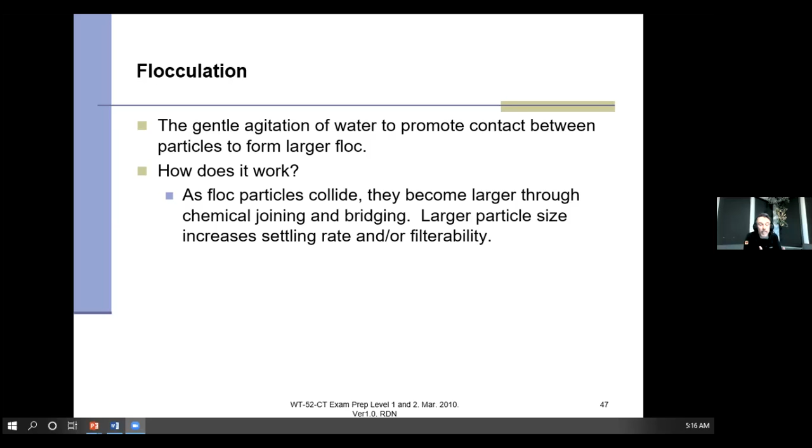And we created these flocks through the coagulation process. So now what we're going to do is take these flocks and mix them very slowly. What we're trying to do is promote contact between all the particles in the water, because we want to make these things bigger, much bigger, like the snowflake looking flock that you saw in the little video there - that's flocculation. Let's let these things work for us, because the more they get bigger, the easier it is to get rid of them, and that's what we want to do.

Let's get these things out of there. As flocks collide, they become larger, right? And again, remember, these things are full, they're sticky, number one. Number two, they have charges, some negative, some positive, and they're going to stick together. The better we make these things stick together, the more they're going to be able to get out of solution, which is perfect.

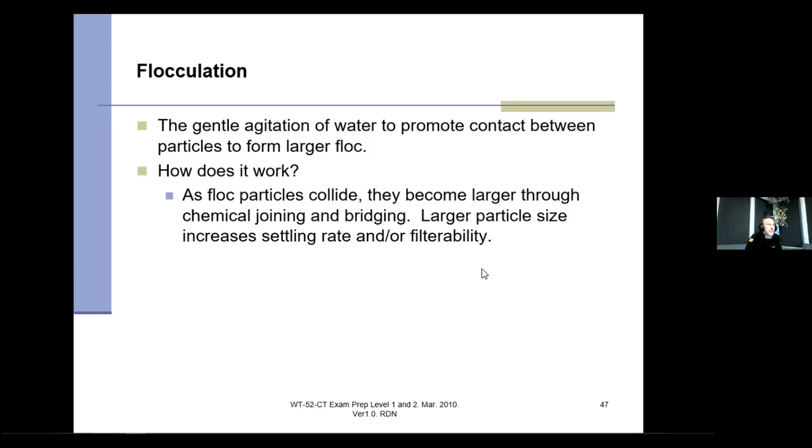Flocculation follows the coagulation process, and is basically a period of mixing. Here's the thing though - we don't want to mix them too fast, because if we create these snowballs and these flocks, and if we mix them too fast, poof, they blow apart again, and then you're no further ahead. So it's very, very important to keep the mixing at a very slow and easy rate, or else they're going to break all these things up again, and then you're in trouble. So always, you want the water moving, but not moving fast like you did in the rapid mix.

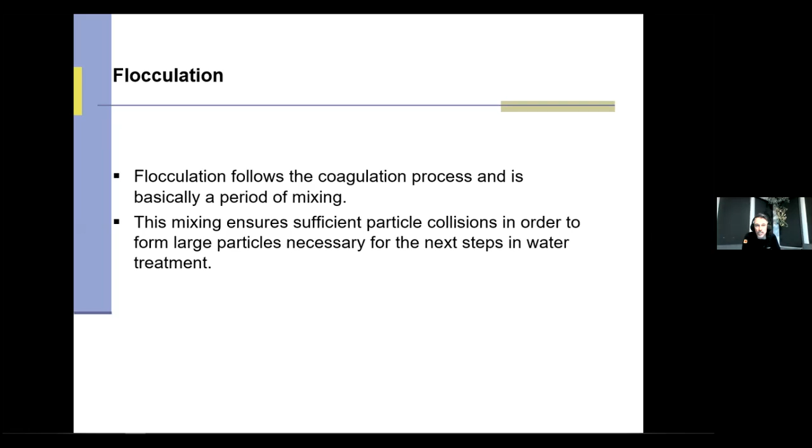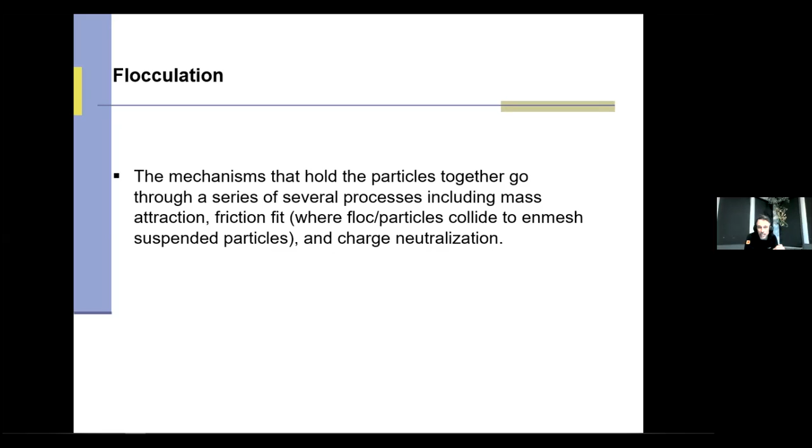By definition, the mixing ensures sufficient particle collisions, and that's super important. It goes through a bunch of processes, right? From a chemistry standpoint it goes through mass attraction, friction - a fancy way of saying all these particles are going to collide. The magnet part, or the charge part, will allow them to stick together. Charge neutralization as well, so we just kind of keep everything all together.

In the flocculation process, it's essential that the flocculation agent be added slowly. Some plants will add a flocculation agent, and we'll talk a little bit about that. The words flocculation agent and polymer, or polymer aid, are all very interchangeable, and they have a certain reason why we do it, but we'll talk about that in a bit.

All we want to do is basically - coagulation is destabilizing those charges. Flocculation is now allowing contact between all these tiny flocks to make them bigger. That's really all we're doing.

We're going to have to, sometimes, there's stuff that happens. So think about if there's not enough weight, right? We've got all these fluffy flocks and they're not settling very well. We're going to add extra things in there to make them sink, or add liquid weight or liquid strength. And those are what we're going to be calling polymer, and we'll talk about that a little later in the lecture here.

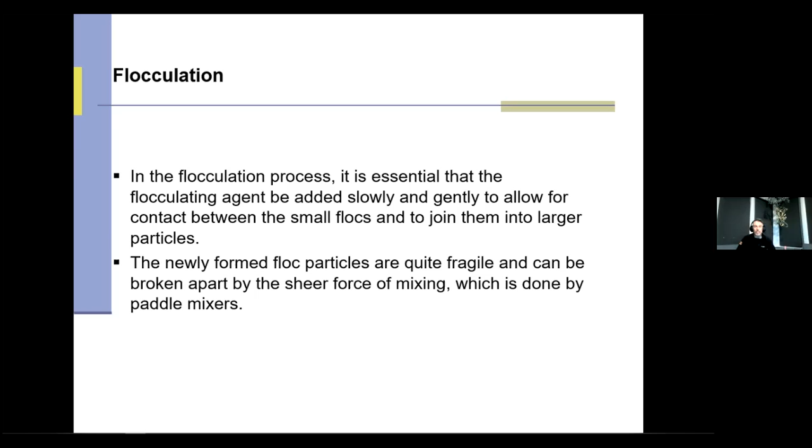These newly formed flock particles are fragile, right? They can be broken apart by mixing too fast, or currents or something like that. So we've got to be really careful that we don't break them.

There's a bunch of different types - again, inline mechanical mixer, vertical flocculators, hydraulic which is just using water. Some places use a different route that the water goes through that it'll mix as it's going. Turbines - these are all different ways, as long as you're keeping the water moving. Because two things: you don't want the water to stop, and you don't want it to mix too fast. So it's really important to keep the water moving somehow.

Typical is the way you saw in the video of my plant, where you have those really large mixers. They're moving very slow, just enough to keep everything in suspension or moving around so they collide with each other. So that's super important.

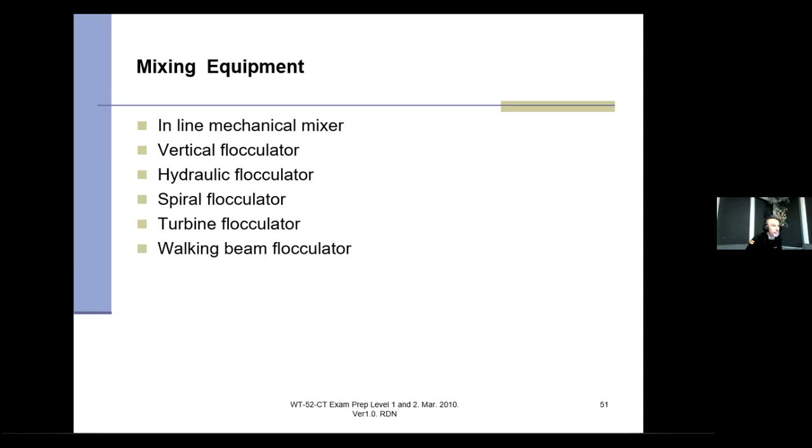We'll talk about coagulant aid, and basically they are a bigger flock agent, and it could be negative and positive. Think of it like liquid weight or liquid strength. A lot of the time they're chains, heavy chains with a bunch of bonding sites on there. And all those flocks, those balls of flock, can actually attach. They can come as positive, negative, or a little bit of both.

And if I'm having problems settling my flock, if that's the process I'm using, this will help it, give it some weight or give it some strength.

So for my plant, as you saw there, when those flocks left the flocculation where you saw that light, I put it to a dissolved air flotation. And a dissolved air flotation has air that's pushing these flocks to the top, and you saw that in that brown goopy mess. Now, if those weren't very strong, the air could actually damage the flock.

So I'm going to add a little bit of a coagulant aid to make my flock strong so that the air doesn't break it apart. So I actually use a coagulant aid or a flocculation agent, and that's what they're called. It will keep things strong or keep things heavier if I need it.

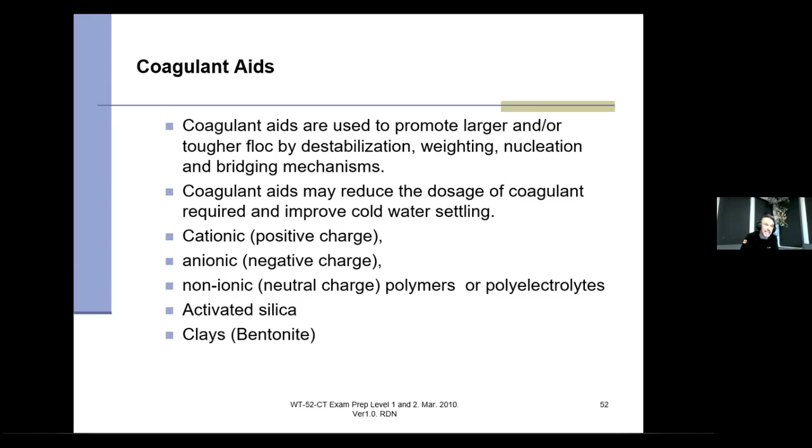For me, I don't want weight at my plant because I'm floating stuff, right? But I want strength. Some plants, though, they need to have weight. So those are the things you have to look at depending on your process.

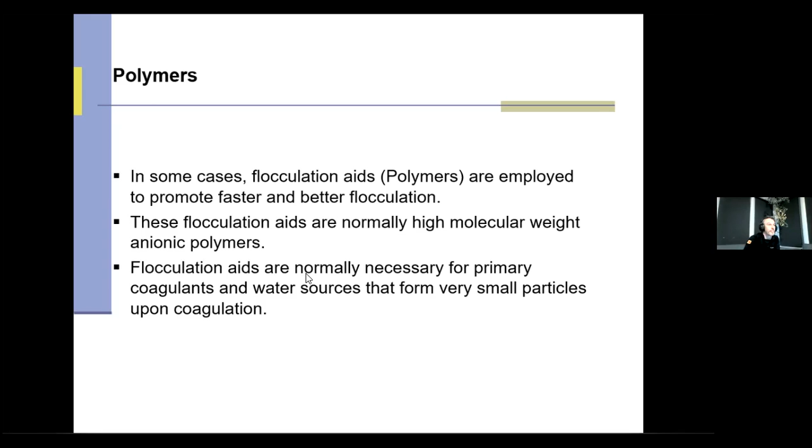Under the microscope, this is what it looks like. And you can see here, my drawing, this is a typical polymer. It could be long or it could be short. It could have lots of weight built in, or it might not. But each of these sites here can take on a floc. So you can see the flocs are made up of positive and negative and all these little particles that were floating around. So that is the coagulant and the colloids mixed together.

Think of this as a bus. All the people get on, the bus gets heavier, it will sink. Or this is big enough so that the air can float it to the top. It all depends on your process.

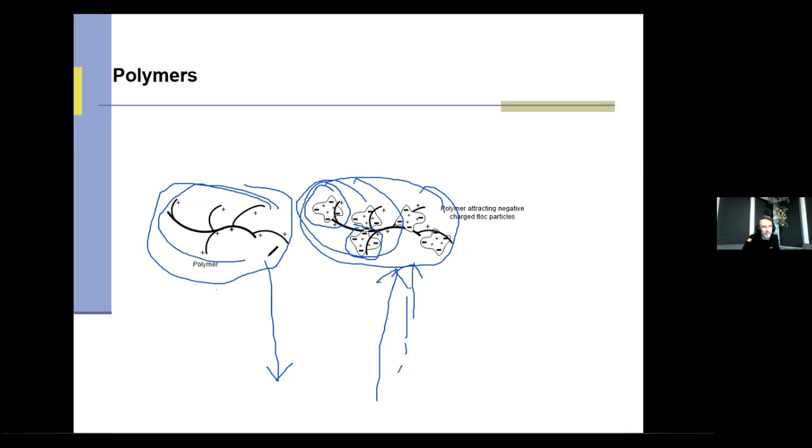For me, I don't want heavy floc. I want something lighter and fluffier, so I would have a smaller one. I would only have maybe these, and so that when the air bubbles come up, they're pushing that to the top, and you saw that in that video I showed you. Some places they want to sink them, so they'll have a heavy polymer to sink these things out.

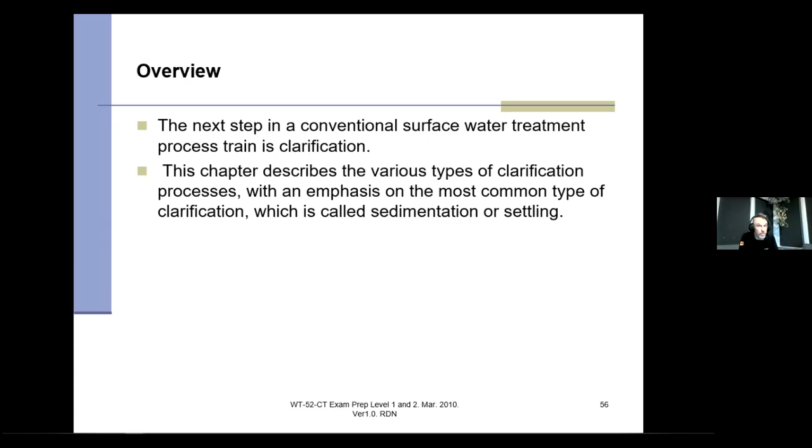It used to always be called sedimentation, and that's no longer used anymore because there's other processes, such as what you saw at my plant, dissolved air flotation, where we're actually floating that sludge, that product, to the top. So I like to use clarification, which makes a little bit more sense because we're not always settling things out.

Why are we doing this? We're removing those suspended solids, removing those floc particles. We want to do that to reduce the load on our filters, because if we sent all that stuff to a filter, it would plug that filter very quickly. So we don't want that.

Clarification, again, includes the solid contact clarifiers, sand ballasted flocculation, which is quite widely used now, and square or round sedimentation basins, we'll look at those. But the big thing is, let's get this stuff out of there. And that is the number one thing.

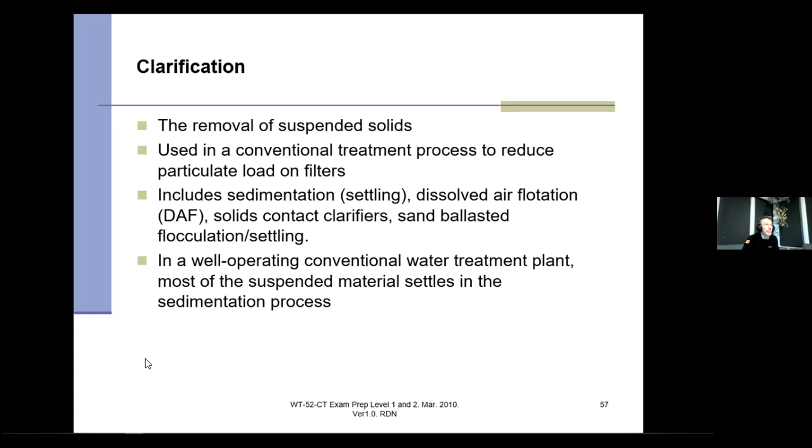Suspended solids, and it could be anything, turbidity, or these flocs that we created, are denser than water, and we're going to try to remove these by gravity. That's the easiest way to do this. When we stop the flow or slow down the flow, things will fall out of solution. That's really what we're doing here. We're allowing it to settle, or stop moving long enough for it to fall down and collect at the bottom of these tanks.

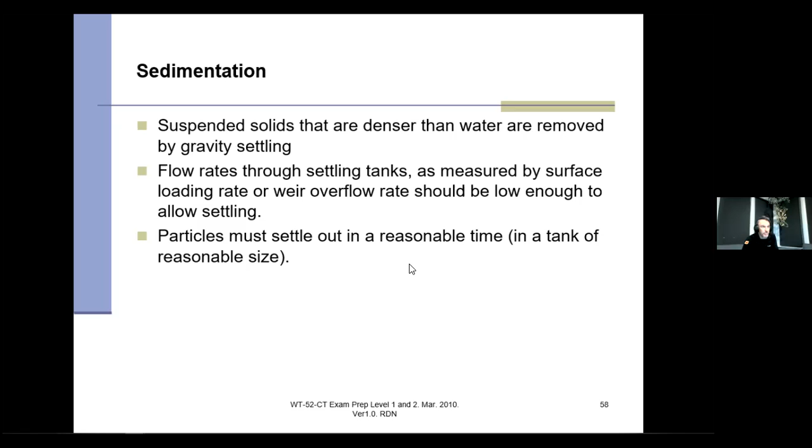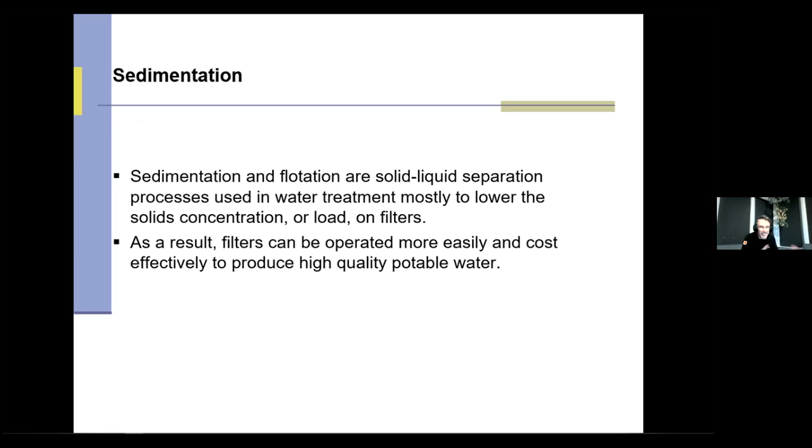Again, our whole thing is to lower the solids concentration. And if I do that, my filters will run a long time. I'll get a long filter run. We'll talk about filters probably next week.

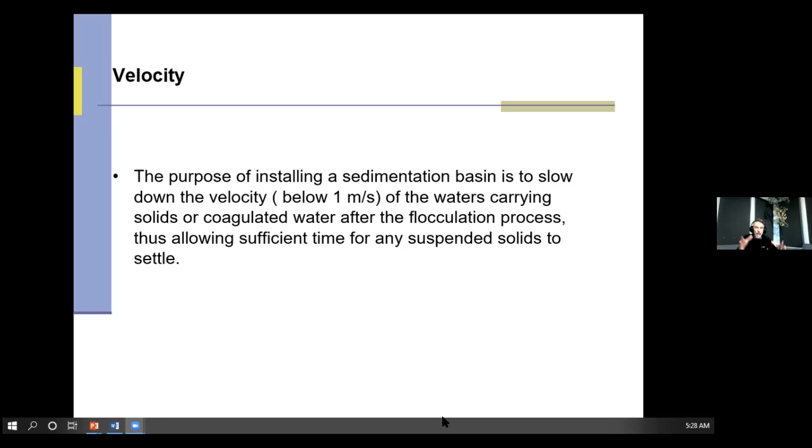Velocity is a pretty important concept, and it's the speed of the water. That comes up in a test a number of times. Speed is super important here because if it's too fast, these things aren't going to settle. We need to have it below 1 meter per second. If it's above 1 meter per second, it will stay in suspension. So you have to slow everything down below 1 meter per second, and that now allows time for this stuff to settle to the bottom.

The type of particles you have sure makes a difference too, and of course denser particles will settle out first. So if you have a lot of sand or silt in your system, that sand's heavy, right? And so that's going to settle out very quickly. If you put something that's light and fluffy, it takes a long time to get to the bottom of your tank. You put a couple of grains of sand in there, it's going to fall very, very quickly.

So you have to design these basins, whether they're square or round, long enough to allow what you have to settle out. And sometimes some places put sand in there. They'll inject sand, coagulant coated sand, because it will attach the particles and drop it very quickly.

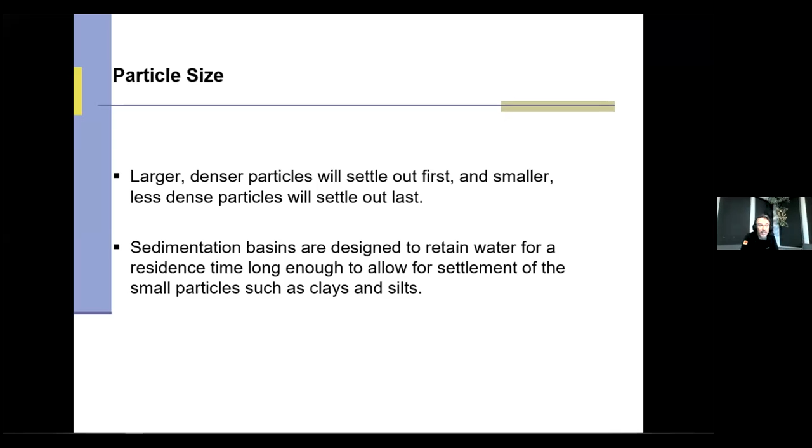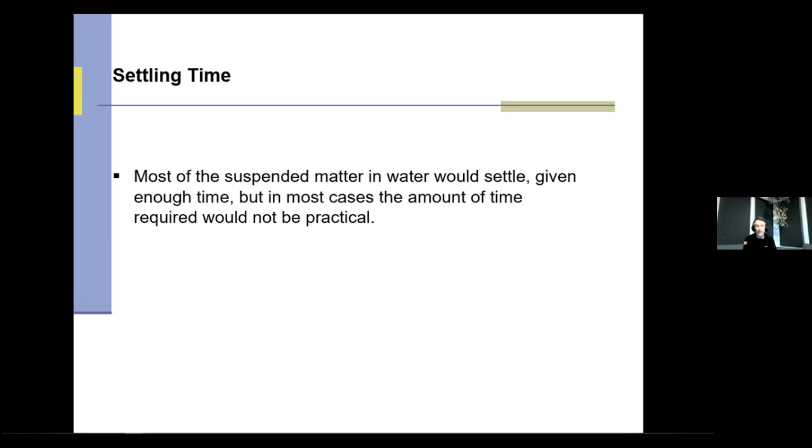In time, most of the suspended matter would settle. We know that, but we don't have much time. We don't have hours and hours and hours to wait for our particles to fall out of the water. So we have to try to speed things along, and that's why we do this. Polymers are our friend when it comes to this because we want these things to settle quicker.

Let's talk about the typical rectangular basin first. So basically your water's going to come in, it's going to be moving pretty fast, and all of a sudden it's going to be in this big open tank, and it's going to settle. It hits this big tank and everything's going to settle.

So there should always be something at the bottom of these tanks to remove this sludge and get it out of there. Proper maintenance is also very important to make sure anything collected at the bottom is removed. You saw in that video I showed you where you saw my empty mixing tanks. I do that because I have to clean those out once in a while to make sure that everything is clean. It's just part of regular maintenance.

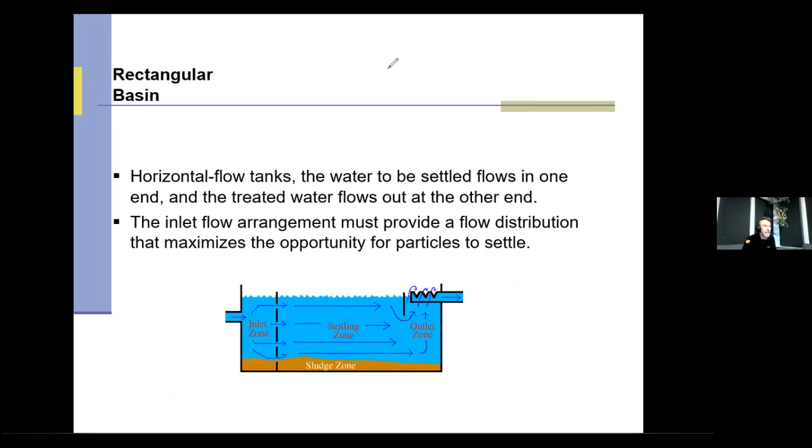And that's the rectangular basin. They use a thing called plug flow, and all the liquid advances together, right? That flow is moving as a unit all the way through that basin.

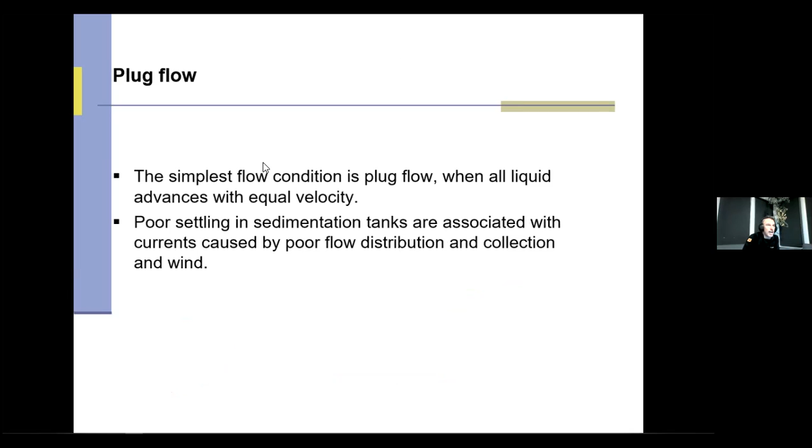The inlet zone, we saw that there. It's basically a smooth transition from the floc basin. It slows that flow right down and distributes that water evenly across the whole basin. It should reduce short circuiting. It slows that velocity down, and the big stuff starts to fall out in this inlet.

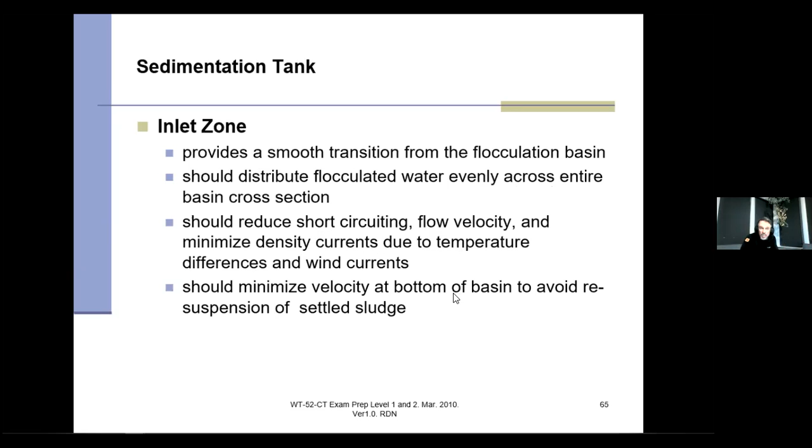The settling zone, again, that's usually the largest portion, and that's where most of that settling happens. Typical detention time should be about 3 hours. It takes a long time to get through there.

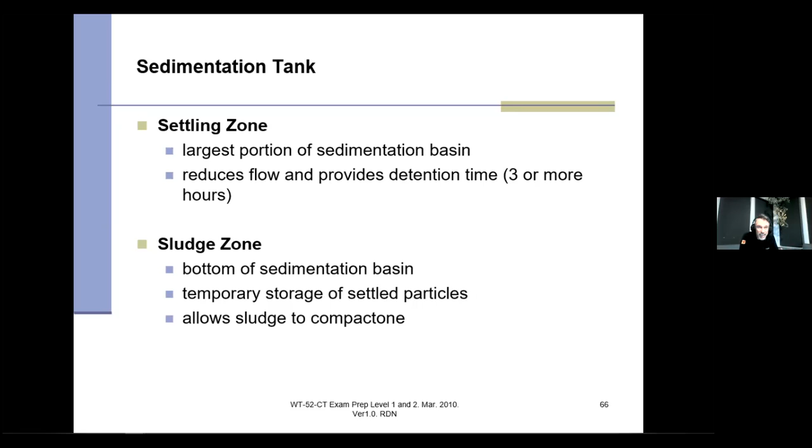At the sludge zone, we have to do something there - temporary storage, of course, but we got to get those out. They can't stay there. Then the outlet zone, and that's the transition from the sedimentation process, or the clarification process, onto the next process, which is going to be filtration.

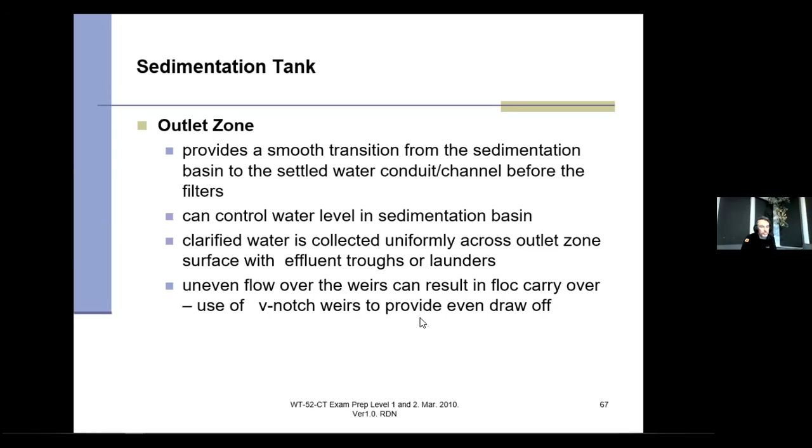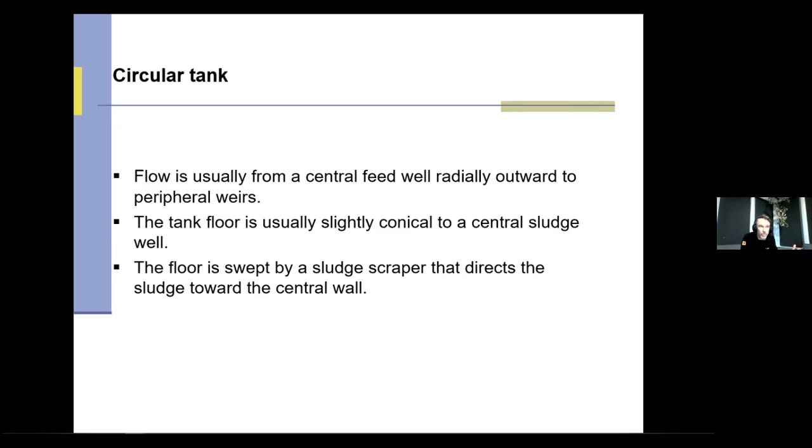Let's talk now about the circular tanks. Circular tanks are pretty popular. Flow comes in through the center of that circle, and it works outwards. So it has to flow basically in a circle and come out through the top. It's like a cone at the bottom, and then there's a scraper. I've got a good picture here of this.

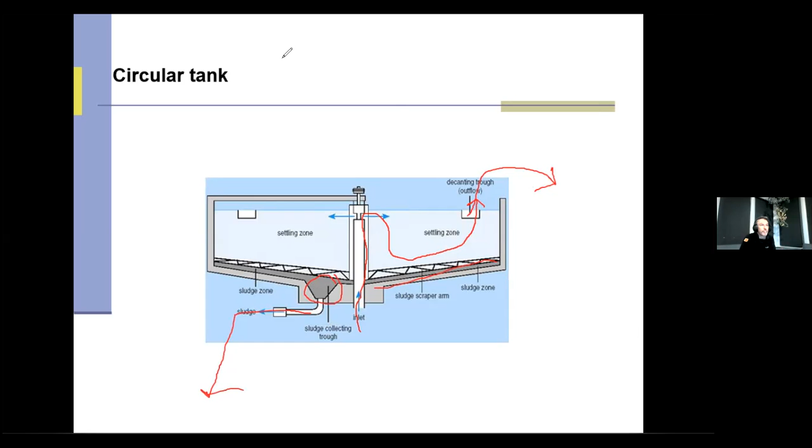The older stuff is really square basin, but it works well. But you'll see a lot more of this circular tank.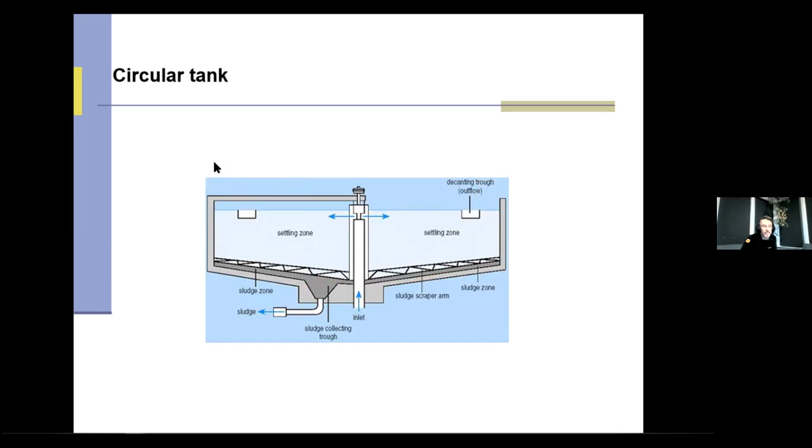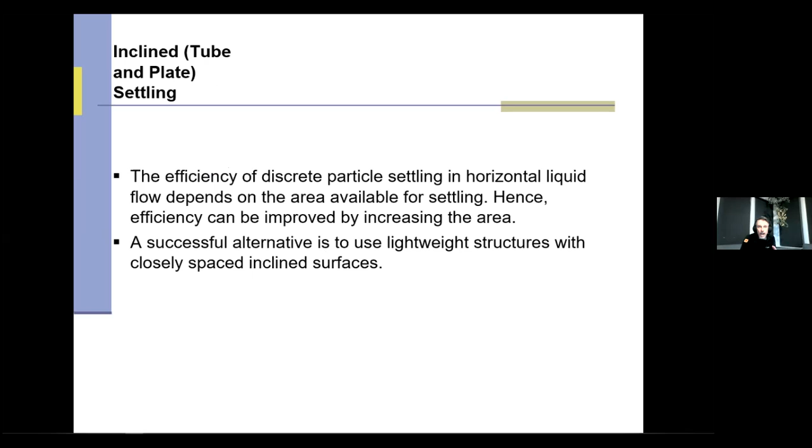Another thing you'll see too, and my plant used to have this particular unit, was something called an incline plate settler, also called a lamella clarifier. Basically what we do here is move water up a 60 degree incline plate.

So it acts as a little bit of a filter, and it works really well. This is called a tube settler or a lamella clarifier. It's important that this is going to be at 60 degrees or better - that's the angle it has to be in order to work. If it's any less than that, things don't work as well. So you always have to make sure of that.

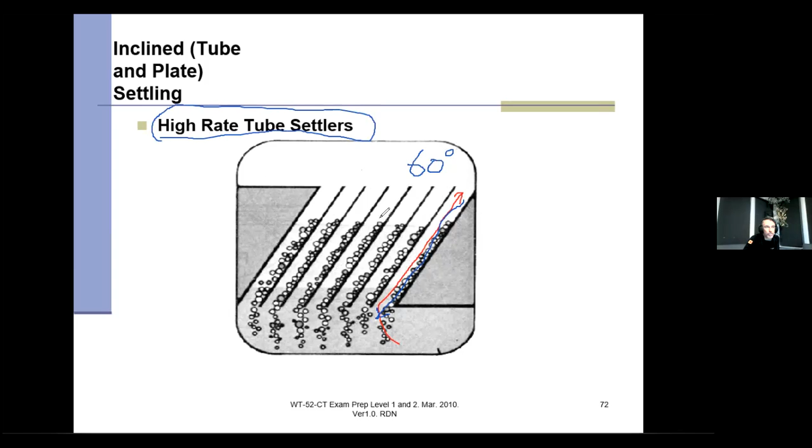You can see a typical unit here, and I actually have one of these units at my plant for my backwash waste - we'll talk a little bit about that when we get to that chapter. Water's going to come in through here, and it has to travel up that 60 degree angle out to the end, and the sludge is going to move down and fall into this hopper at the bottom. That's really what it is.

It works fantastically. Again, I like to say the 60 degrees is the target. It works well, and there's no moving parts inside there - the water's doing all the job, and that's exactly what you want. There's no big mixers or anything crazy in there. It works fantastically, so I'm always pretty happy about that.

And those are called incline tube settlers, lamella clarifiers. Sometimes I'll add a little bit of polymer just before I add it to here, and that allows me to make sure that it's heavy enough that it's going to slide down that particular plate.

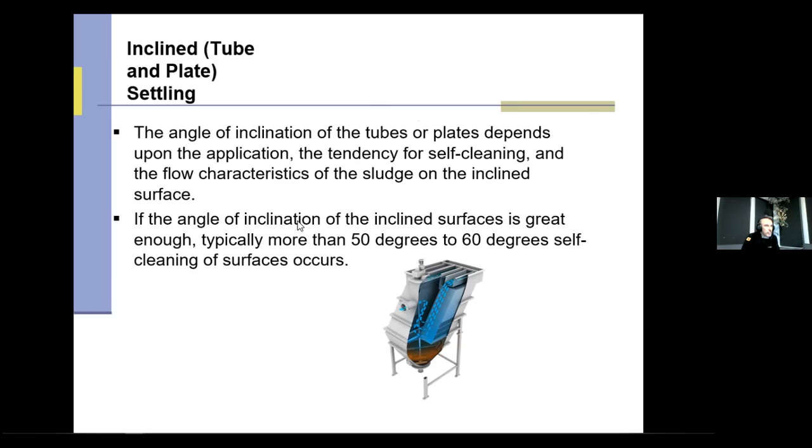We'll talk about the solids contact unit. A solids contact unit clarifier is a pretty hard clarifier to use. It basically takes everything we just talked about today - coagulation, flocculation, and sedimentation - and does it all in one step, all in one tank. It's a lot more difficult to control because there are three processes happening inside here, and it's always really, really tough.

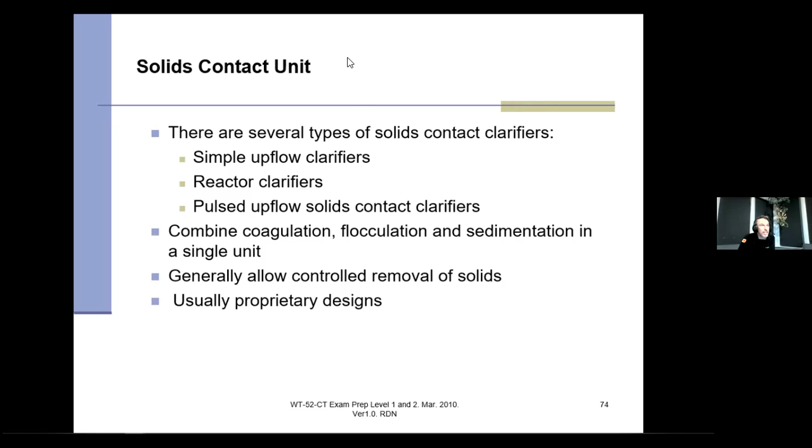Also in here is bacteria, coagulant, flocculant - all the stuff is sitting in there. I'll answer that question in a second about adding more coagulant, but hang tight with that one.

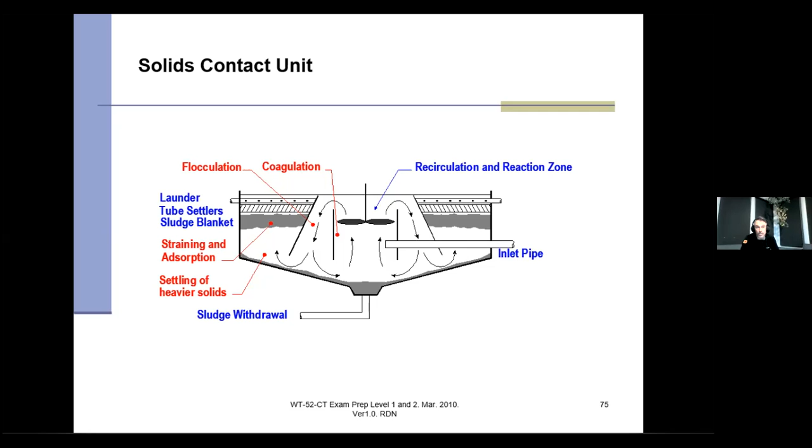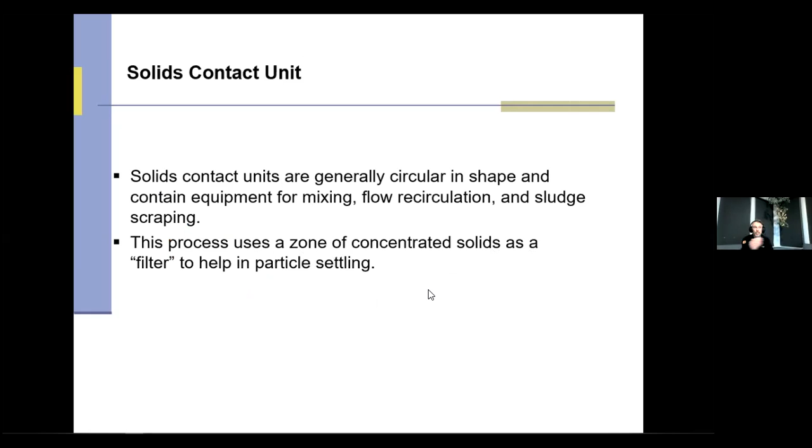So that's a solids contact unit that we just talked about. By definition, it uses a zone of concentrated solids - that jelly layer - as a filter to help in particle settling. It's your job as an operator to make sure this zone of concentrated solids is good.

Dissolved air flotation. What I'll do is show you the rest of that video from my plant of my dissolved air flotation, which is what you saw earlier.

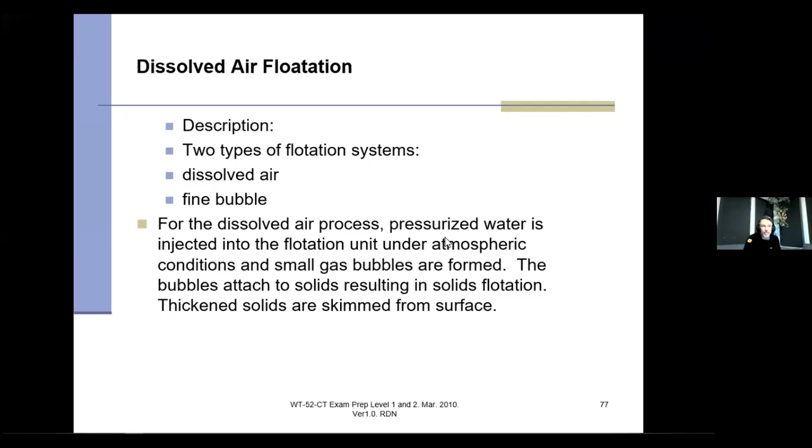It basically works like this: pressurized water is injected into the flotation unit under atmospheric conditions. It forms gas bubbles, and you can see in this picture here with my pen. I take some water, mix it with air, and think about a soda pop. Imagine I shook that thing up and opened it — it fizzes up. There's a lot of energy there.

That's exactly what I'm doing here. I'm pumping air into a saturator and making it super saturated with air. Then when that air enters this tank, there's a lot of energy, and that air bubbles will push your floc, all that stuff, to the top right here. You saw that in my video.

All that stuff at the top, that's all the floc that I created. Over time, I'm going to take a rake and push that stuff out of there and get it out of the solution. The good water is going to leave at the bottom through those white pipes you saw, and the stuff at the top is going to go on to another process or get dewatered.

This is a very effective process, especially if you get the bubbles right. Again, if your flocs are too big, it won't work. We don't want this stuff to ever settle — we want it to float. So it's really important to keep that floating.

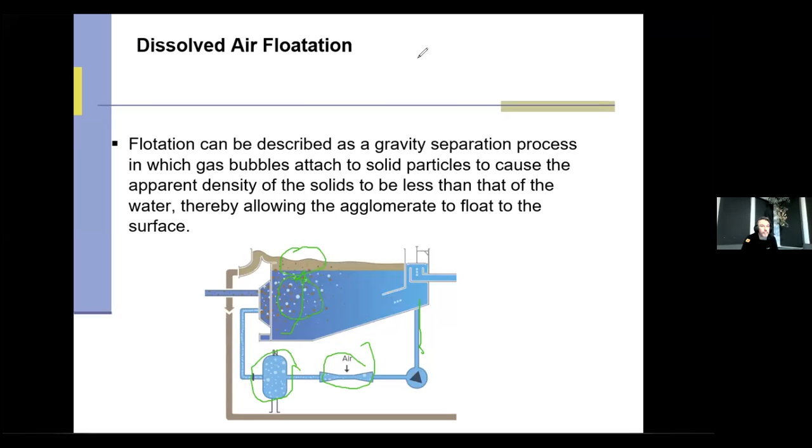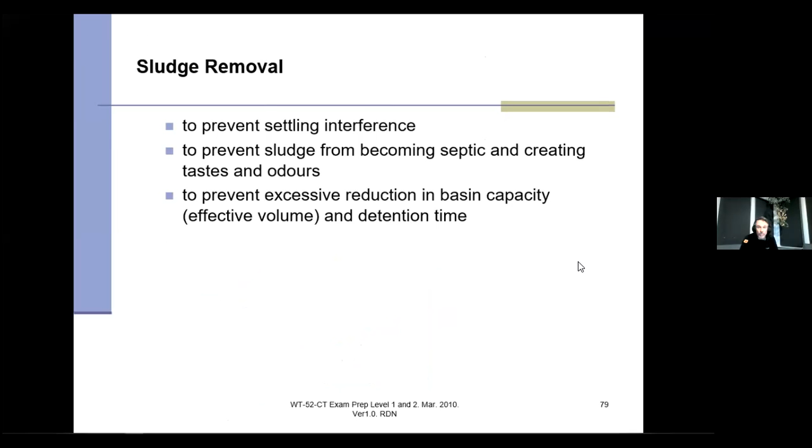Okay. Sludge removal — we're going to talk a little bit more about sludge removal in a couple of chapters from now. Again, we don't want sludge to stay in there, because what it does is become septic and creates more taste and odors, and that is not what you want. It also takes the basin capacity away — the less capacity we have, the worse it is.

All right, that's our last slide for today. I'm going to throw a couple more videos on — I'm going to show you two more things before we go today. First, let's take a look at the DAF again — you saw the first part of it, so I'm going to show you the second part where I'm actually scraping the floc away after it's been treated. It's pretty gross. The second one is I'm going to show you how I add coagulant and polymer to my flocculation and coagulation process. Give me a second, I'm going to flip over to a video here.

Okay, you should be able to see my video here. You should see some rainbow-looking pipes — if you can see that, give me a thumbs up. Awesome. So what you're going to see here is the DAF unit, and I'm hoping this is the right video — I have two of them here, so if not, I'll throw the other one on. But you're going to see the product coming off the DAF, or the DAF itself.

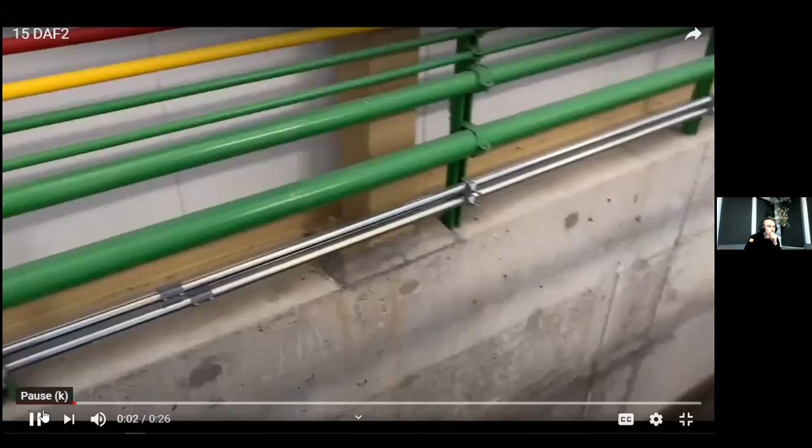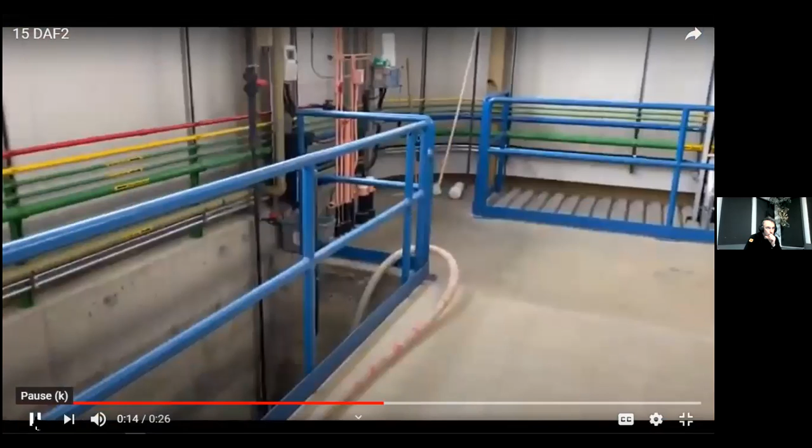Now, water leaving the DAF — it looks pretty clear. You can see it here, and that water is coming from those white pipes at the bottom of the DAF that we saw earlier. Let's take a look at the turbidity coming off of that today — there it is right here: 0.25 turbidity leaving the DAF. That's pretty good, okay, so that's a good one.

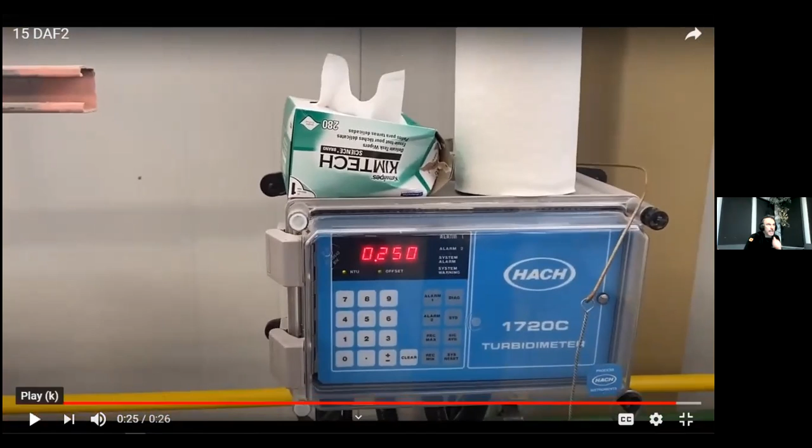Let me just put another video on here. I took those with my cell phone, so I apologize for the quality of them, but they do the job pretty good. Okay, let's get this one going here.

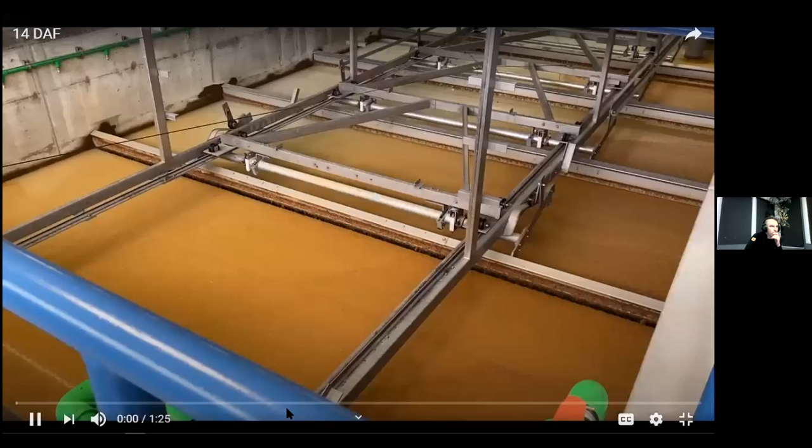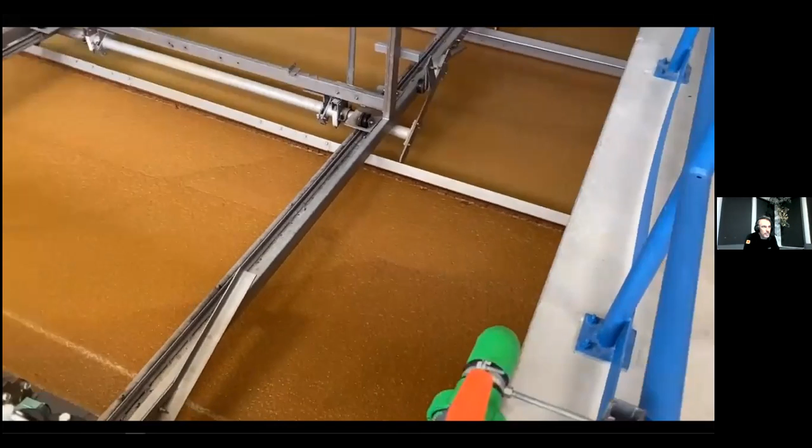Okay, so our skimmers are running — you can see how they're moving here. They're going to be moving that product over this way. The whole idea is to get rid of that stuff. The water underneath should be really clear, and you can see this going right now. Let's see if I can get a closer look down in here.

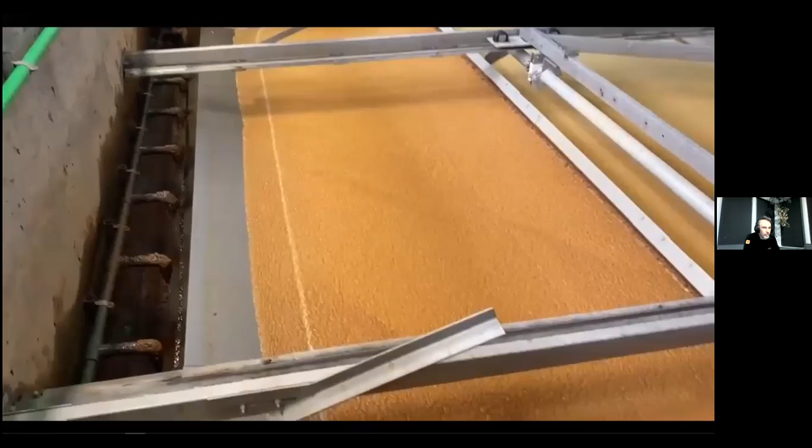Now those brushes are pushing that product towards what they call the beach, and the beach is that silver part that you see right here. It's going to push all that sludge and stuff up the beach and into that trough to the left here.

Here we go. Imagine all that was in our drinking water before.

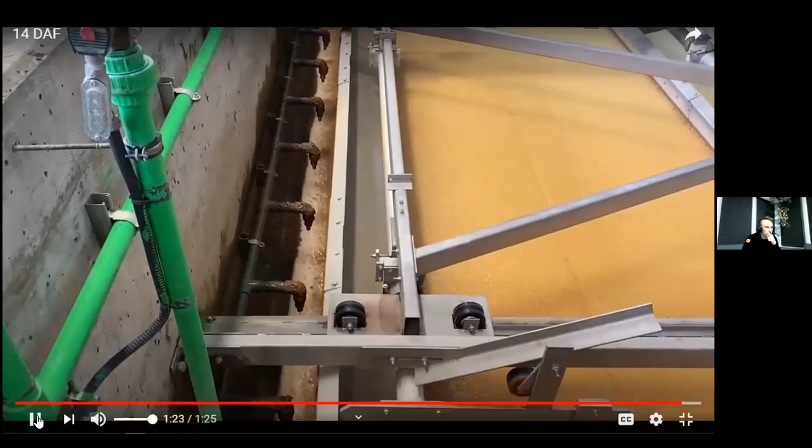Basically, those little flocs are all your color and organics, and there's bacteria in there, of course. But those are what we're trying to develop, right? In this case, we see it because it's floating, but in a sedimentation basin, all that stuff would be heavy at the bottom, and it's light and fluffy.

It looks like oatmeal or some sort of paste. That's exactly what we're trying to form here. Those are the tiny little flocs that we created in the coagulation process. So it's pretty disgusting, really. All right, let's...

I'm just going to show you now our coagulant room real quickly here. This is our main coagulant room. We've got a fairly large tank in this particular room, which I'll describe when we get there.

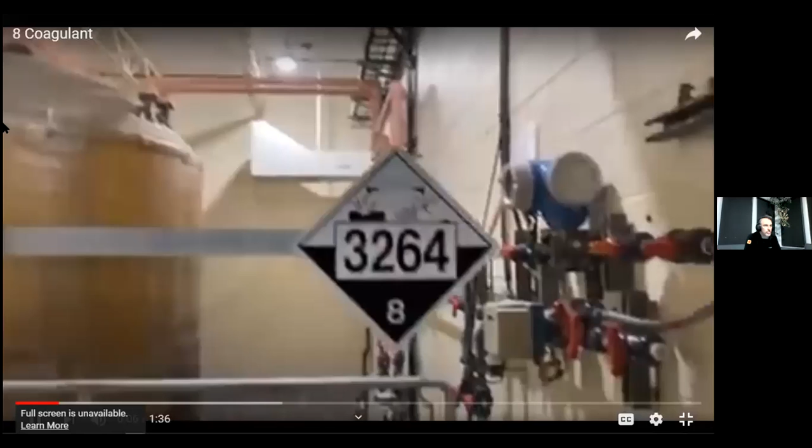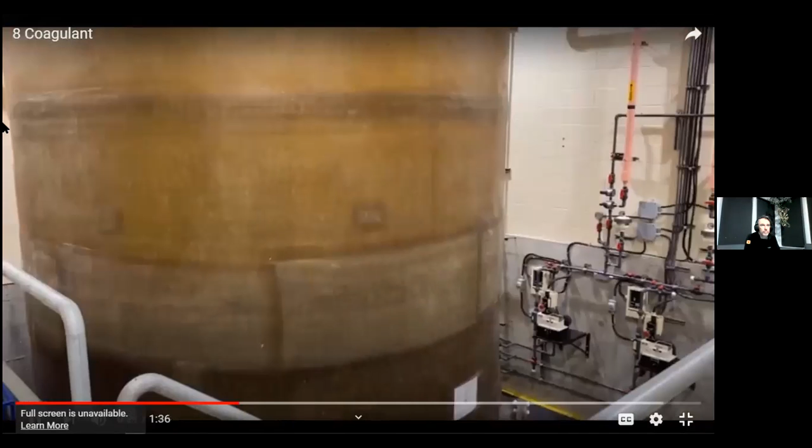Next room we're going to see is the coagulant room. This is the plant's main coagulant. We talked earlier about what coagulant does - it's our liquid positive charge. We also have a nice big large tank here, a little over 30,000 liters. Product gets trucked in, you see the pink hoses, it goes to the top and drops inside.

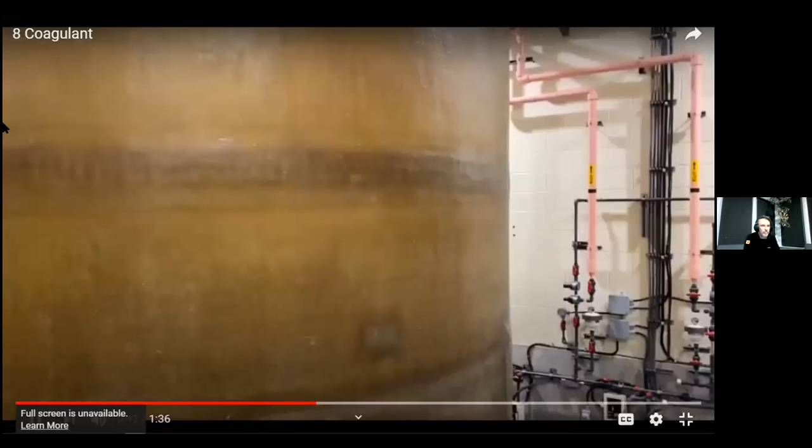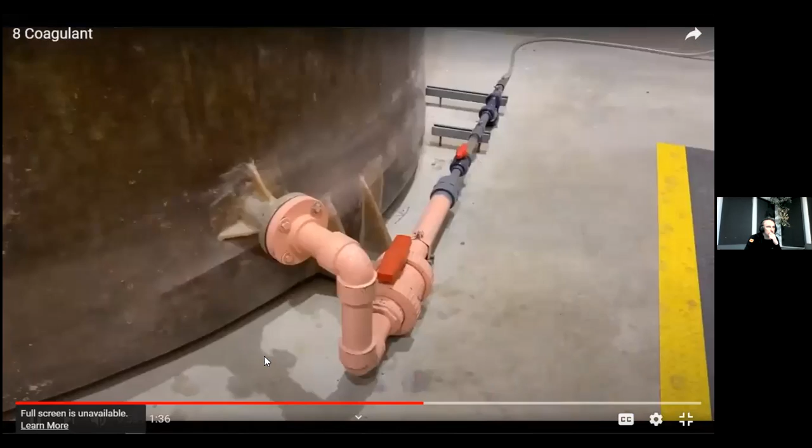What we're going to do is pump this stuff. Now, tanks like this need to be accessed from time to time, and you can see access points here. Product's going to leave through this network and into two diaphragm style pumps.

After the pump, it goes through some pulsation dampeners. So that gives you an idea - this is an older style installation. It will have the diaphragm pumps. These are fairly large for the coagulant, and that's our main coagulant.

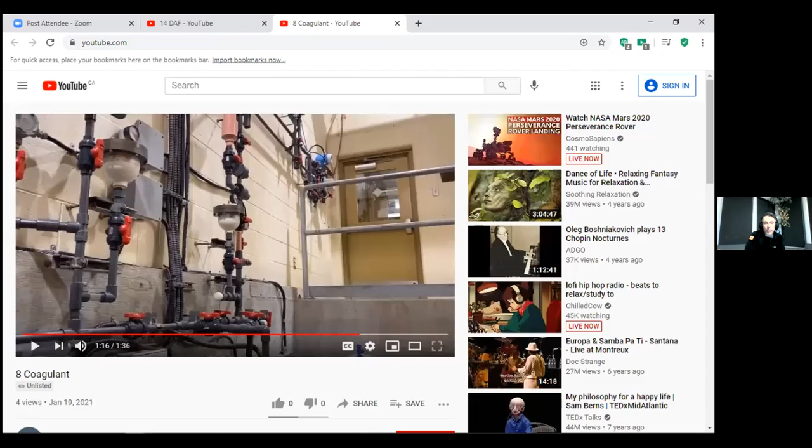Some of the new installations - and I'll show you our polymer because we also put a polymer on there - use a peristaltic pump. So I'll show you that one as well. It's good to see, the peristaltic pump works really well.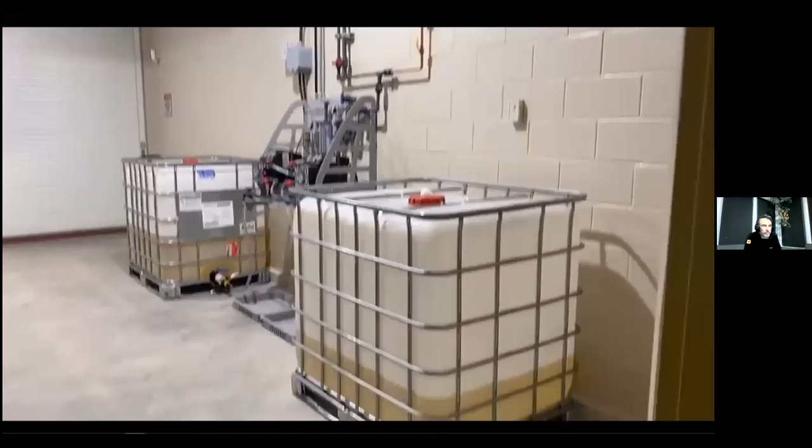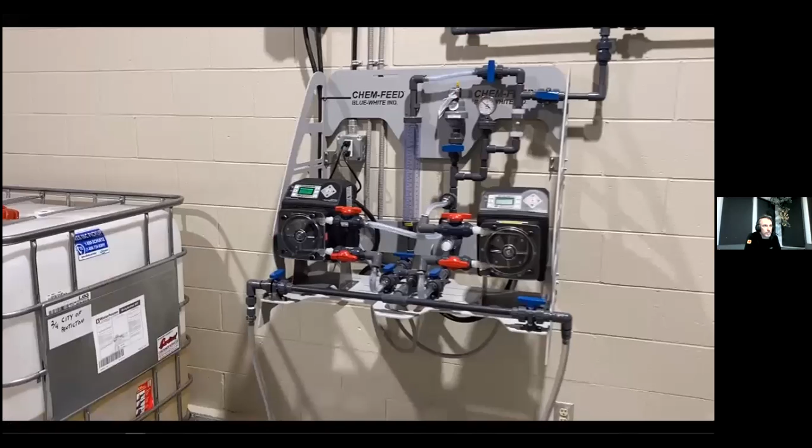Next room we're going to see is the coagulant aid room. What does coagulant aid actually do? If our regular coagulant isn't doing enough, this can give us a little bit more charge when we need it. So if we have to get more color removal, this is what we're going to use.

Again, we're using a peristaltic pump like we saw earlier. It's turning really slow, you can see the rollers in there. We're making sure in our flow meter up here that things are running.

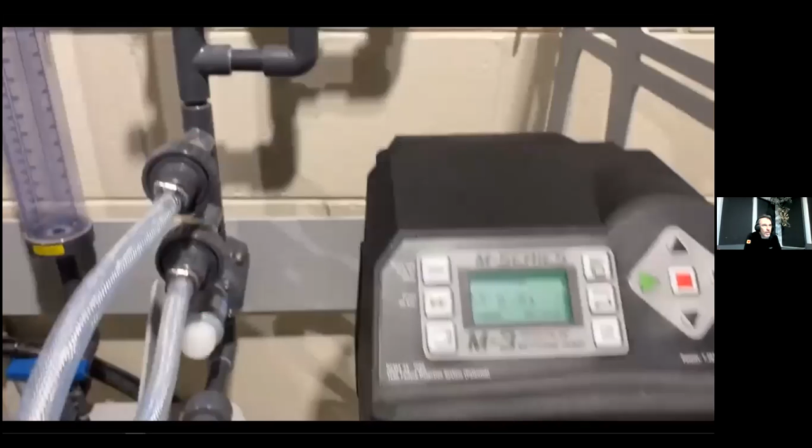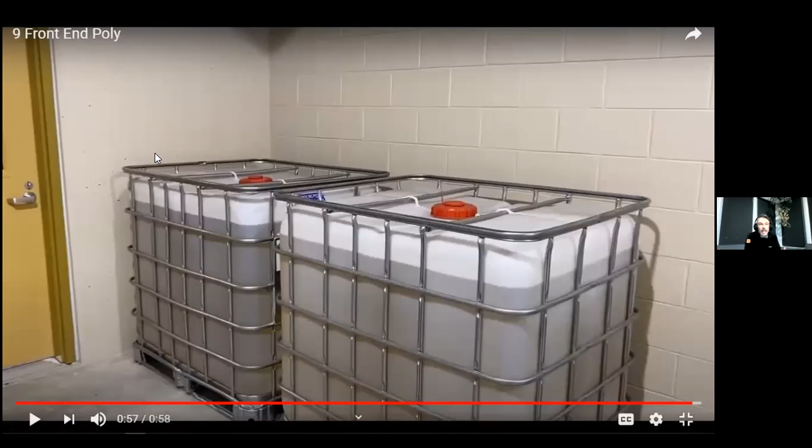So that is the end of today's lecture for the intakes and coagulation and sedimentation or clarification. We will continue our lecture next week, getting into the filtration part. So exciting that we're moving through that, and then into some of the specialized treatment stuff in further lectures past that. Thank you for staying awake with me today, and hopefully you guys learned a little bit today.